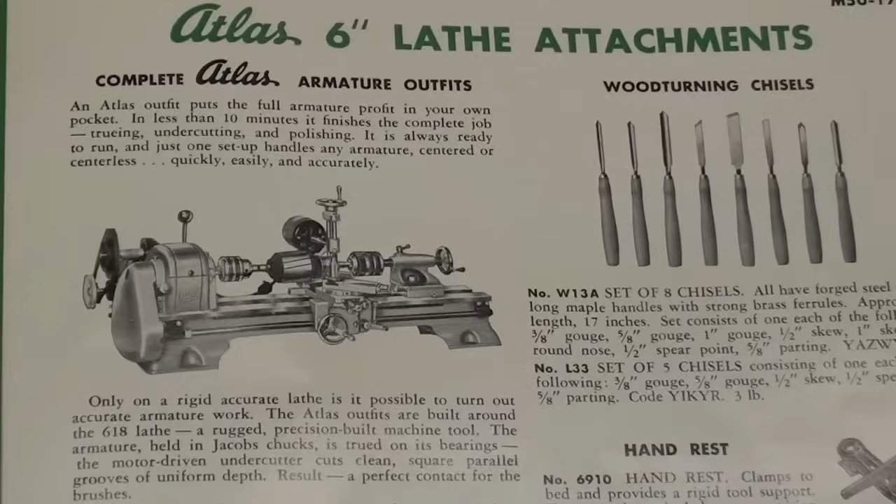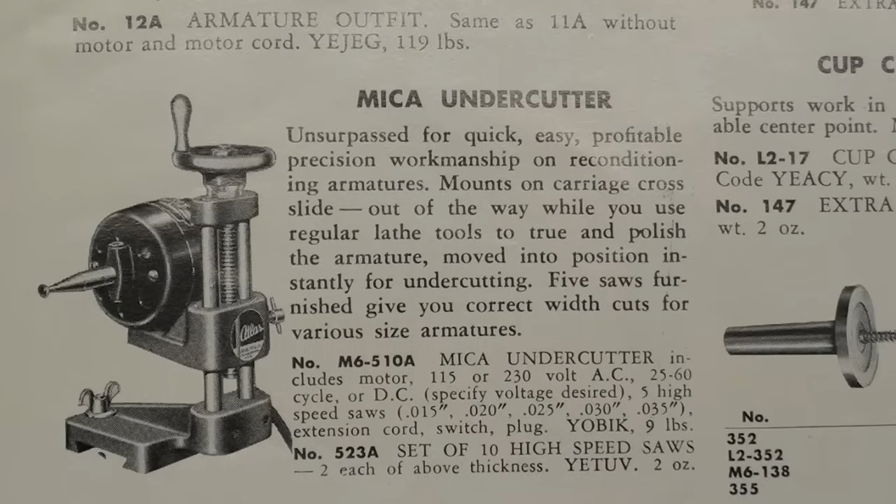And farther down on the page is the beautiful little mica undercutter, which we're going to talk about here momentarily. Now, they made these in two different sizes, for the 10 and 12-inch lathe and for the 6-inch. And I think only the base at the very bottom is the difference between the two.

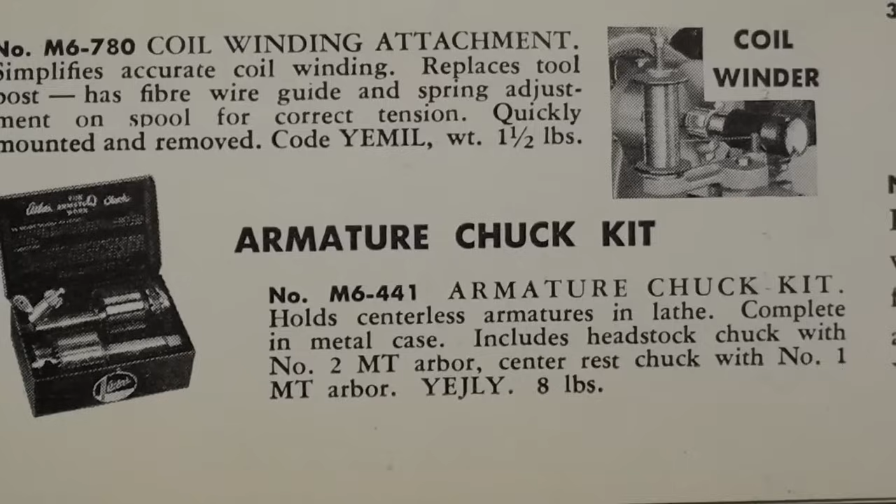And further down, there is the armature chuck kit, and I'm going to talk much more about that. They sold two versions of this, one for the 10 and 12-inch lathe, and the smaller one you see right here for the 6-inch lathe, because it has number 1 Morse taper shanks.

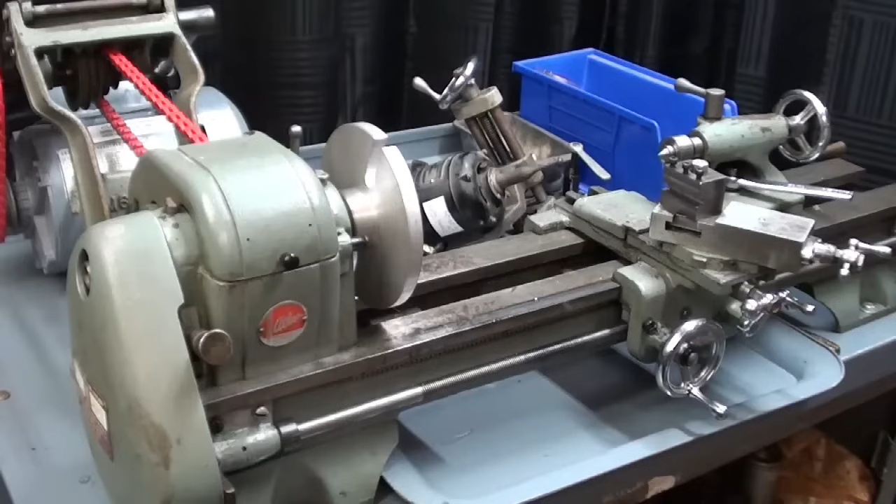Here we are at the 6-inch Atlas lathe, and I just want to show you real quickly how to set this up. I'm not going to actually make any chips, that'll be in future videos, but I'm just trying to explain the general setup of what we're doing here. And there are 3 different ways of holding the armature, so I think I'll cover those real quickly.

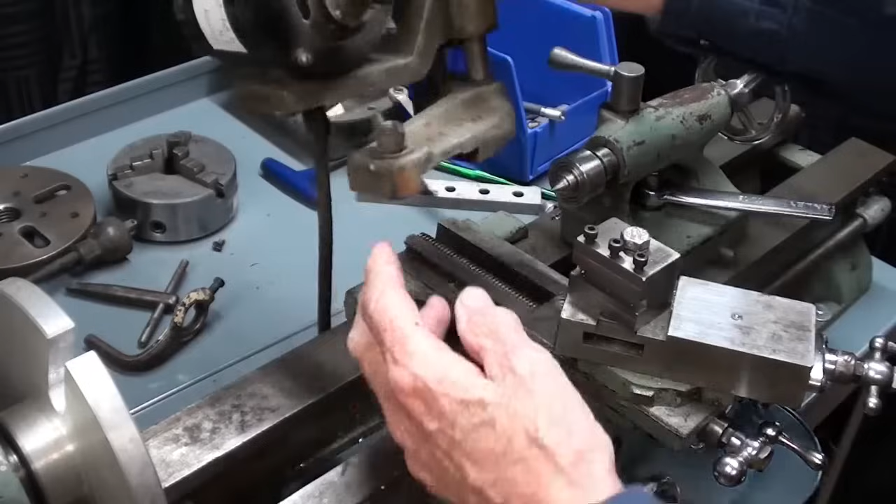But first, let me show you how to mount the mica undercutter. To mount it, remove the screw and take this little cover plate off. That only takes a second, and then you see there's a dovetail right here, and that goes right on the cross slide like that, and you can move it up and back and forth until you get it in the position that you want, and you would lock the wing nut.

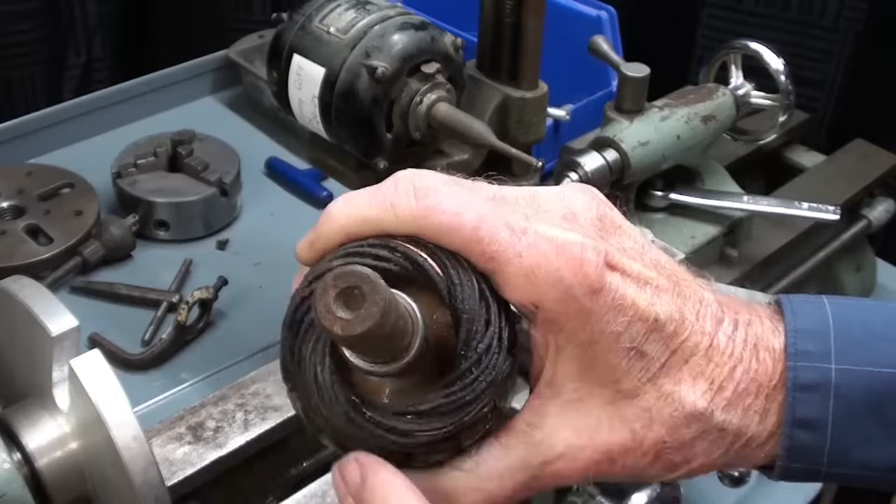Most of the older armature shafts have center holes, and this one does, but not all of them. Also, sometimes those center holes will be beat up by Bubba and not usable unless you clean them.

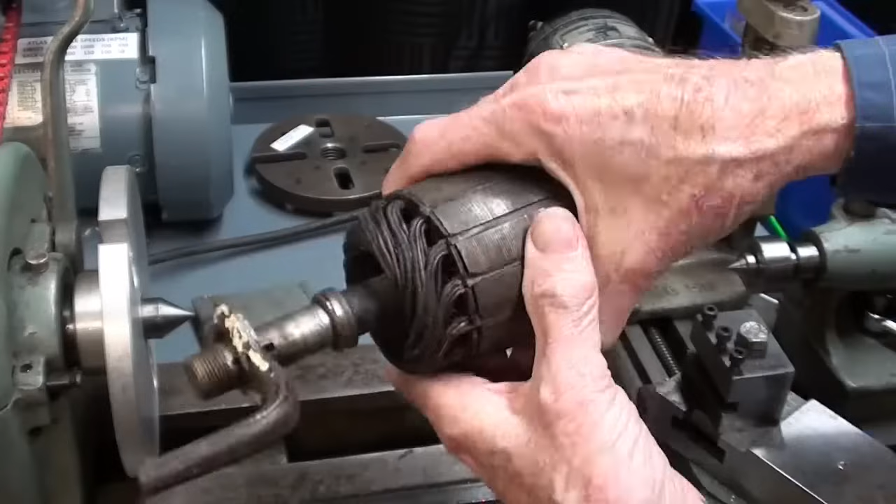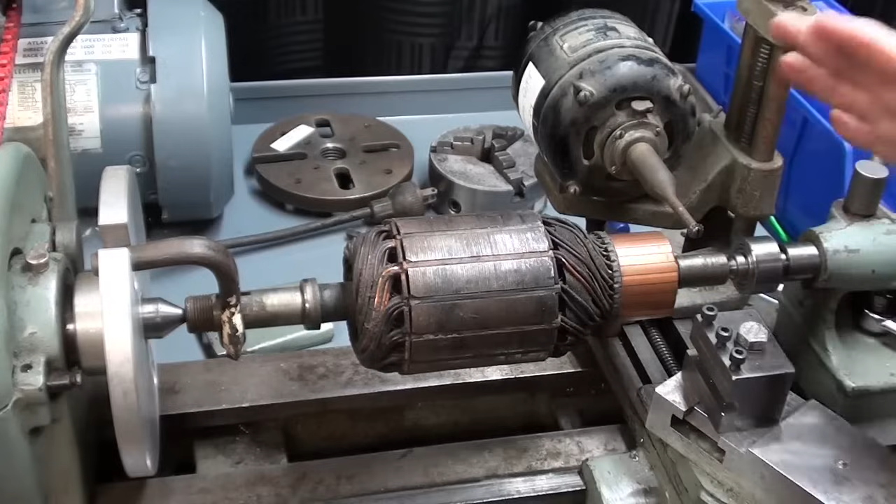But first I want to show you how to hold it with the dog. If you're going to hold the armature between centers, put a dog on there of the appropriate size, and a drive plate, dog plate, face plate, and a center in the headstock, and then set it up like this between centers. Lock everything, and then it's ready to both turn and to undercut.

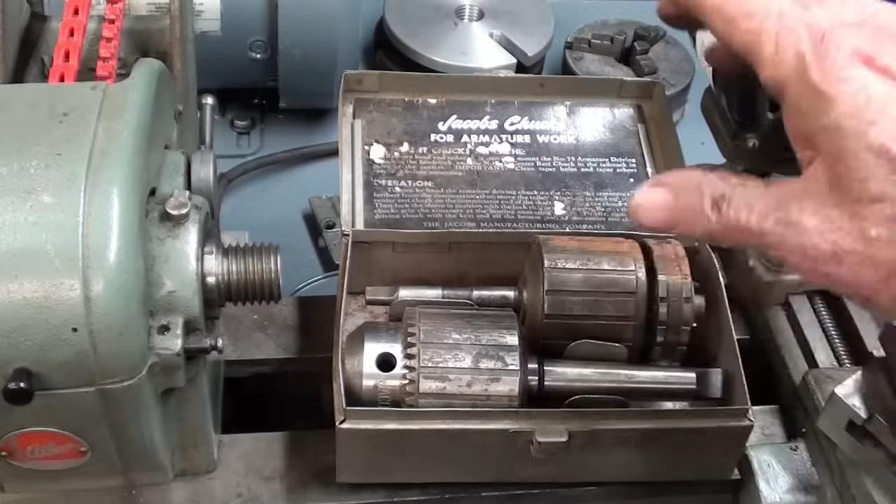Let me show you another way. I just showed you a picture in the catalog of the Jacobs Chuck commutator kit, and Jimmy Goff from Indiana was very kind to me and sent this along to me, but these are special chucks. Now, they made these, as I said, for the 12-inch lathe, and this is for the smaller lathe, because these are 2 specialty chucks. I'll talk more about it in a minute, but this one has the extra large jaws.

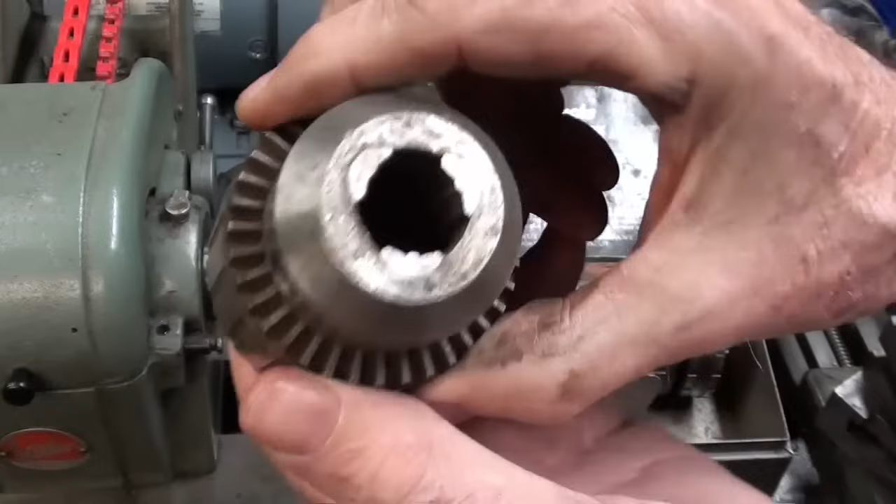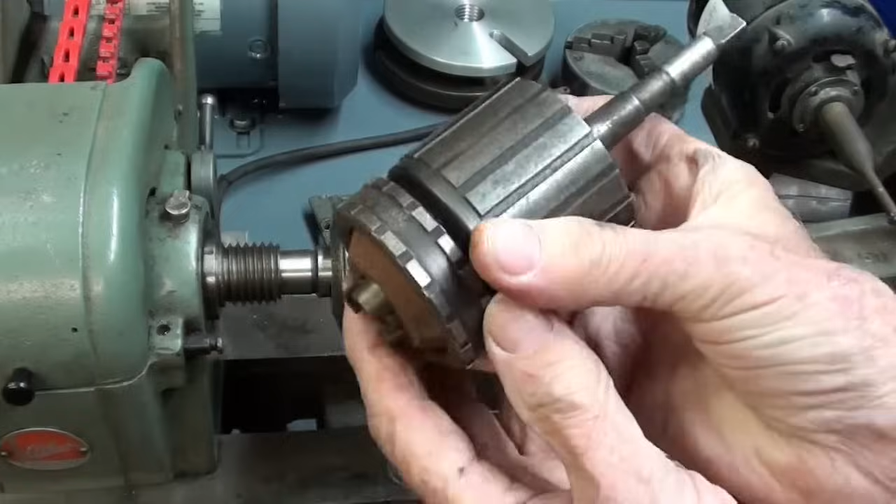It's called an armature chuck, and a number 2 Morse taper, and that'll fit directly in the headstock. I'll get that out of the way like that. And then the other tailstock chuck, and I've shown these many times, has brass jaws, number 1 Morse taper, and that's going to go in the tailstock.

There it is. There's the brass-jawed chuck in the tailstock and the big chuck in the headstock. What I do not like here, and that's just the way you see it in the catalog, is the amount of spindle sticking out. It's just way too much in my opinion.

There are Jacobs chucks that will fit directly on here as well. I do not have one of those to show you, but you could also just use a regular 3-jaw chuck if it's accurate on the headstock. So as you can see, there's various ways of holding it, and all of this can be done on other brands of machinery as well, but of course this will not fit, for instance, on a South Bend. They have their own system for that.

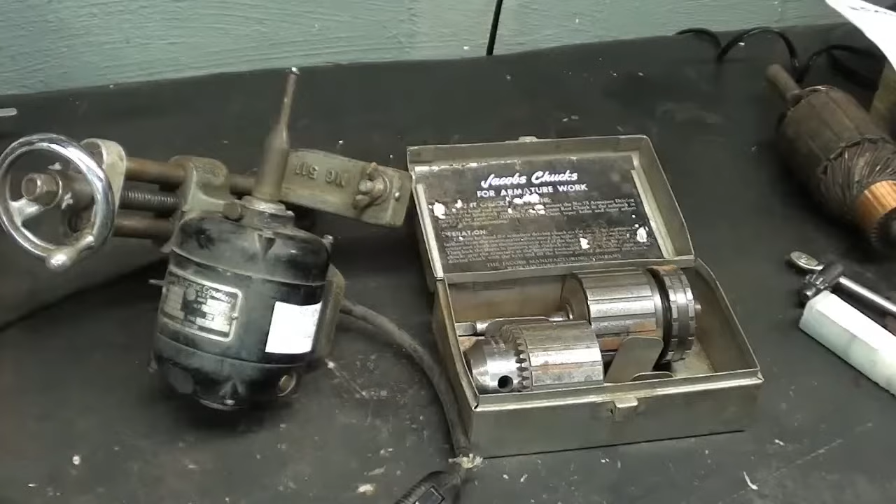Thank you, Jimmy Goff, for sending me all of what you see right here. The problem is this was badly damaged in shipping. I've talked about that before. So this needs to be rebuilt, repaired, reconditioned, and that will be the next video because that's going to take a lot of time.

But let's talk about these two right now, and I want to start with this, although I have already mentioned it. They do not sell these anymore, so don't even bother looking, but you might find them on eBay and they won't be cheap. Nice little metal box, and the date right here is 1954.

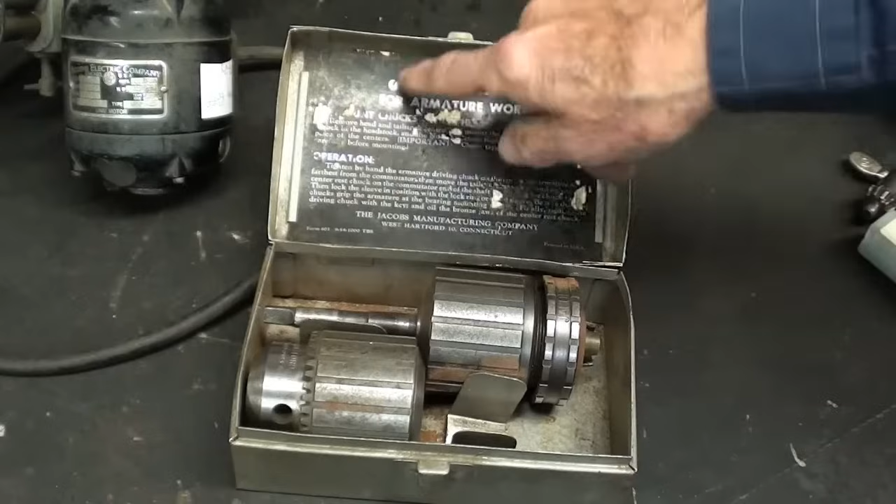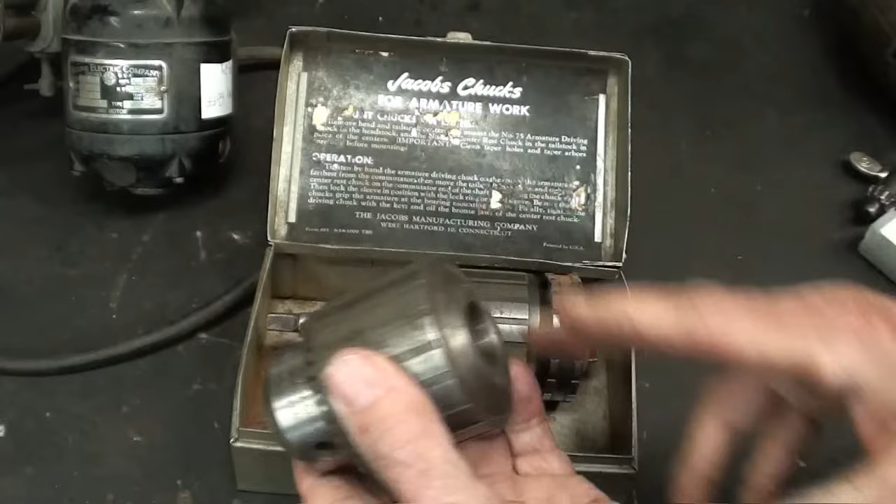At least that's when they printed this informational sheet right here. So that's interesting, a little bit hard to read, but you can always learn something by paying attention. But the interesting thing here is this chuck. Now it's missing the arbor, but no problem, I happen to have one in stock.

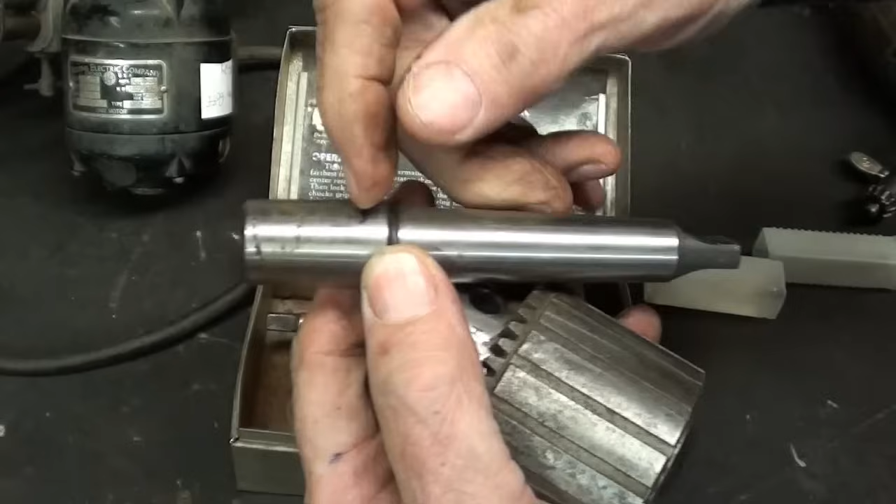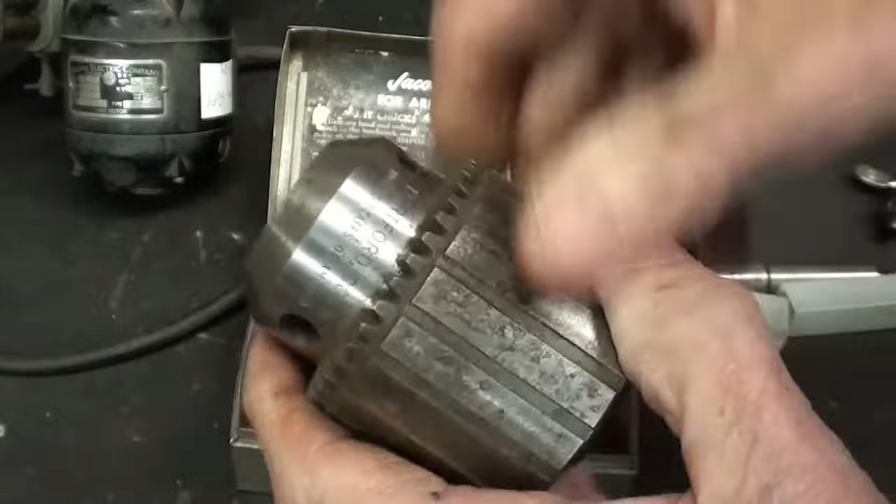And that's a number 3 Morse taper, a number 3 Jacobs taper, a number 2 Morse taper, and I believe I need to cut the tang off in order for it to work right. And this hole has to be cleaned up. Matter of fact, the entire chuck is actually in great condition other than a little corrosion, which doesn't hurt a thing. But in examining this, I could not have been more shocked.

I had to clean it up a little bit to even read it, but it's genuine Jacobs, West Hartford, Connecticut, and it's a number 75A armature chuck. I have never seen what looks like a regular drill chuck that is an armature chuck, and it does not close all the way. I think it'll go down to about a quarter inch, so it's not meant for drilling, but it opens nice and wide to hold the armature shaft.

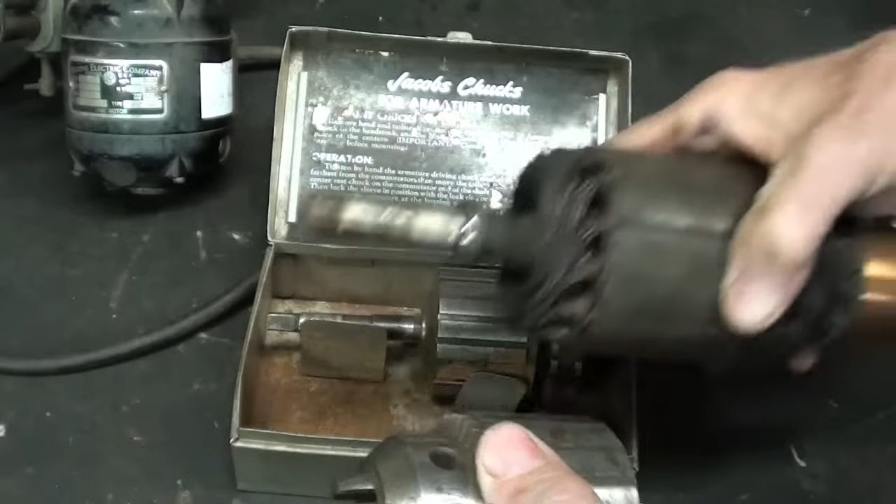So I thought that was interesting, and I went back into an older Jacobs catalog and they made no mention of it, no listing. So this is the only one I've ever seen, at least that I have paid attention to. So I will clean that up and mount that permanently.

But let's take a look at the other chuck. Again, a lot of rust, but the brass jaws are in excellent shape. And these can be used for other purposes, but certainly not holding drills for drilling, but for any work that you need to hold that does not have a center hole, it would work just nice in the tailstock.

So to open and close it, you turn the big sleeve, and when you get it the right size, then you lock it down. And of course you have to oil the brass jaws. So that's all I'm going to say about these little beauties at this time, other than thank you, Jimmy.

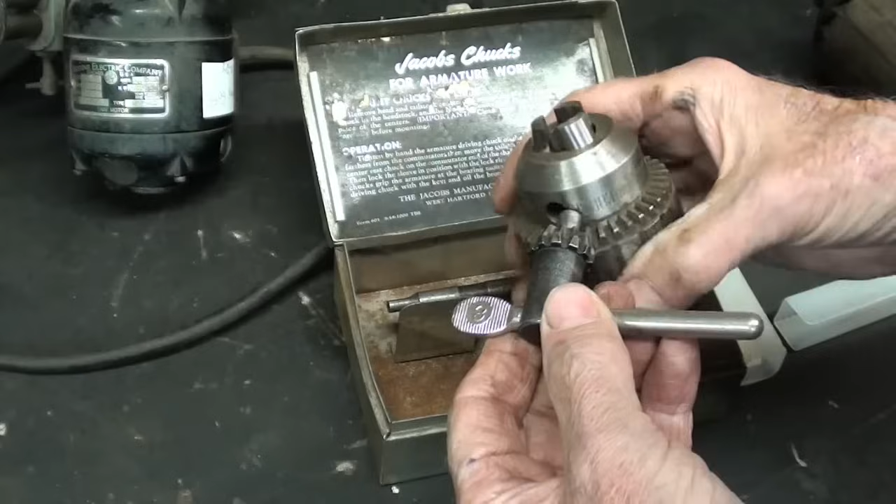There was no chuck key, but it uses a K3, which is probably the most common one, and I got a dozen of them. Well, even though this just came from Indiana, 100 miles, the post office did a number on it, as they usually do. But what did they damage?

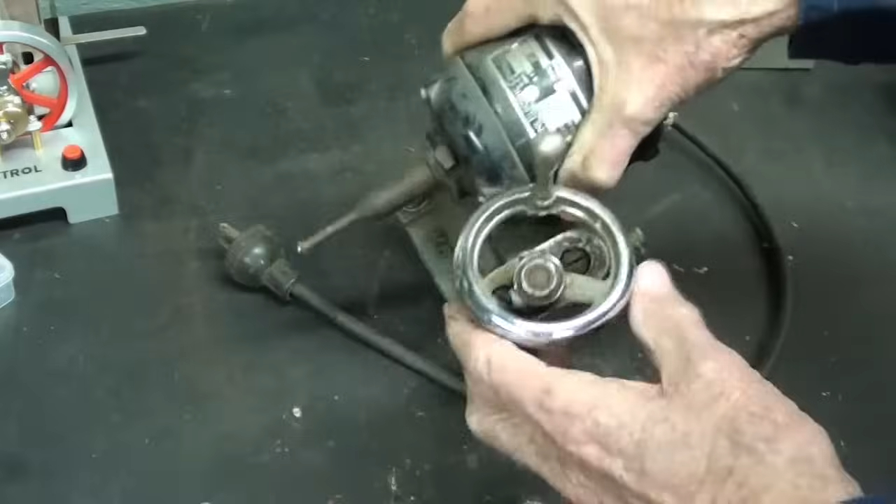First of all, they broke the crank, as you can see. And there's little pieces of it, of the spokes down in the box itself. But here is the miracle. It's almost like divine intervention.

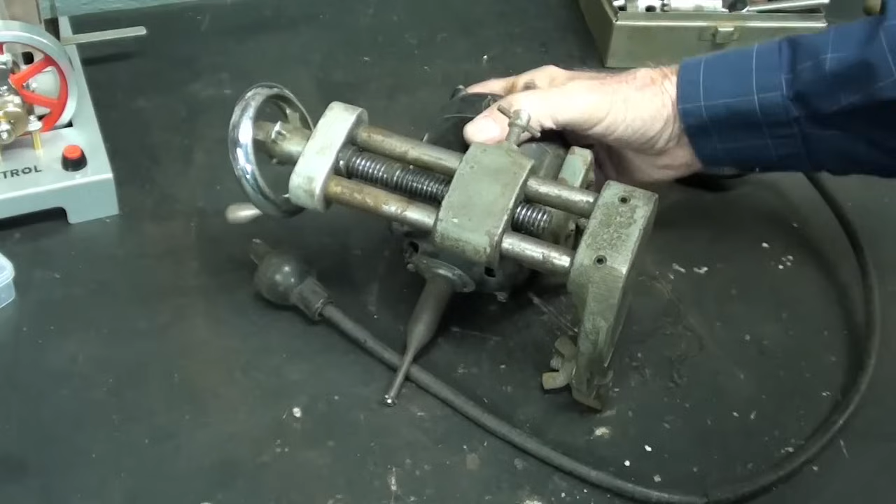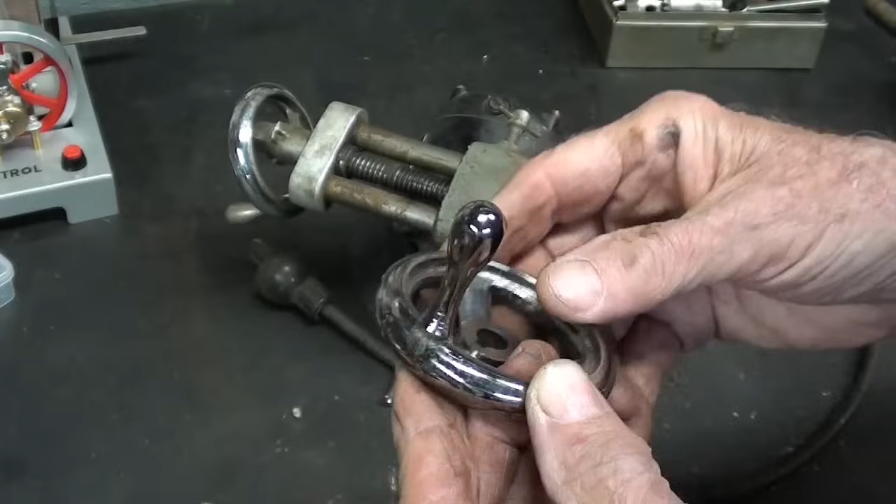Do you remember when I was at Arnfest 2 months ago and I bought that lathe, but there was a box of miscellaneous tooling included, and it came from Nebraska? And you know what was in the box? A hand wheel, and it appears to be the correct one. I just can't believe it that I actually had one of those.

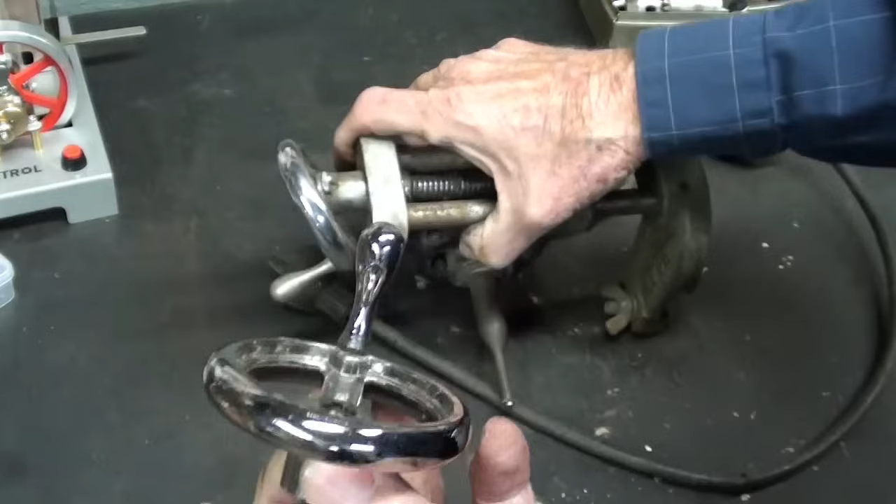But I believe that Atlas used this on more than one machine for different purposes, maybe on the tailstock or the carriage or other accessories. Because why was it in there? And it looks like it's brand new. So that problem is taken care of.

But here's another problem, and maybe this didn't happen in shipping, although I think it did. Can you see that this shaft is bent? Now I hope it's not the motor shaft, that the bend is out here, because I will make a new one, and that'll be in a following video.

The only trick here - I almost stripped this tiny little screw. It's a left-hand screw, so I need a 5-40 left-hand tap in order to even make one of these. You know, there's no end to the aggravation, is there?

And finally, it needs a new cord. As you can see, UL approved. And that's typical of any and all motors or old devices that are 50 years or more - they're brittle. Look at that. Now, Bubba would go ahead and use this with impunity, and he probably wouldn't get hurt either. So I got to replace that.

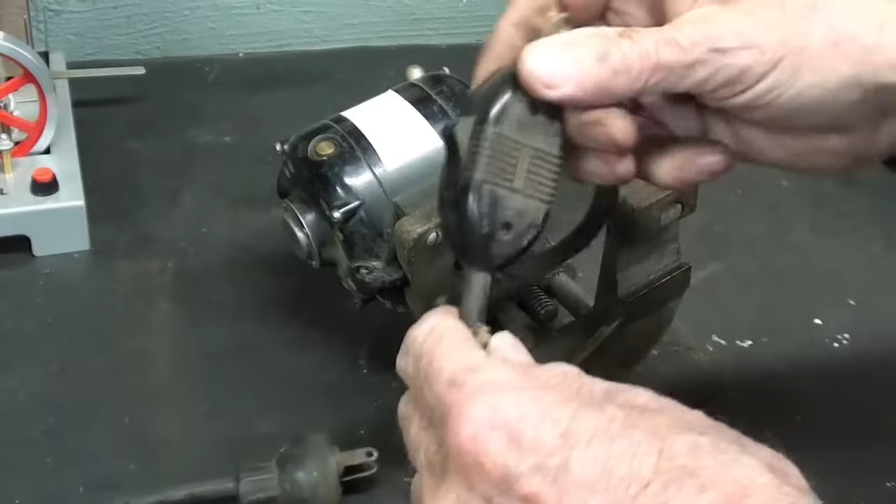I might use the inline switch, but I want to ground the thing, so I have to use 3-wire to meet the electrical codes, NEMA I think they call it. So I probably won't use the switch, and we'll just plug it in for as often as I might actually use this. Now let's talk about the little cutters.

Well, the cutter that was on here was chipped and bad, and where do you get these? Well, I've already asked that question online, and several people helped me, as usual.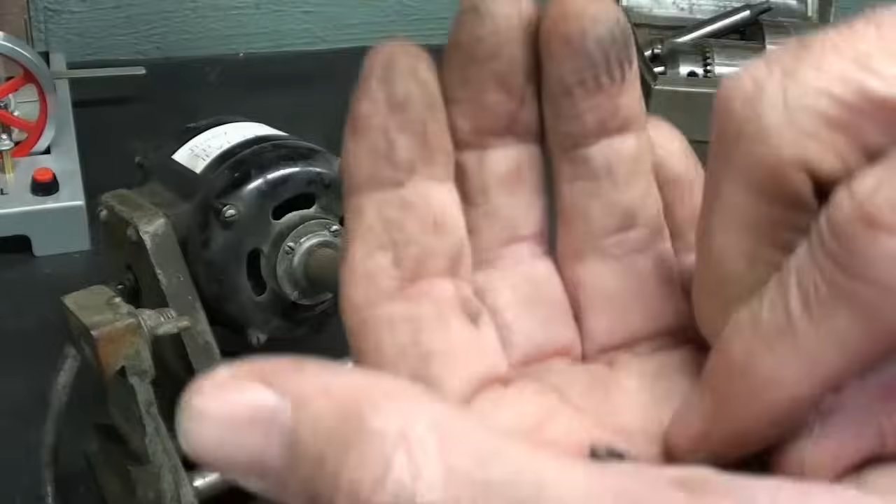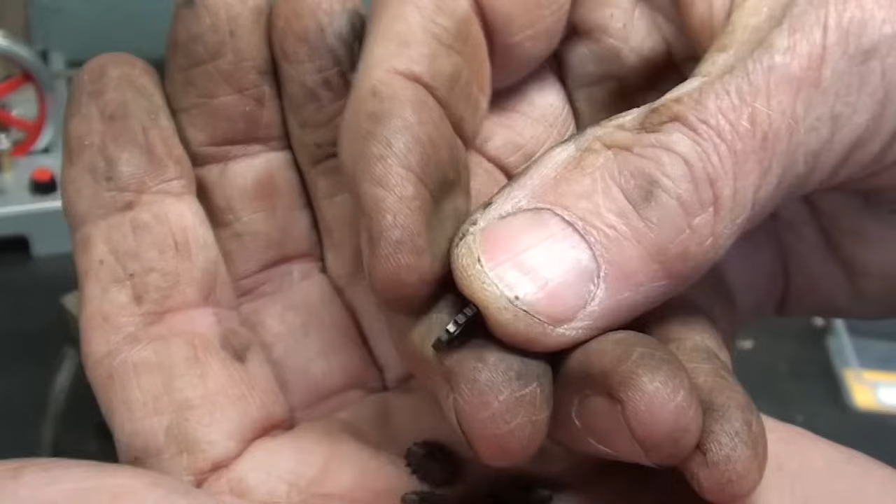But the interesting thing is, one Mr. Jim Files out in California, and he's contributed to the channel before, sent me a handful of these tiny little cutters, and they are 1/8 inch holes, about 3/8 diameter, but they sold them in 5 different thicknesses, and these are rather thick, about 40 thousandths thick, and they might be too thick to undercut. Yeah, they are - they undercut that.

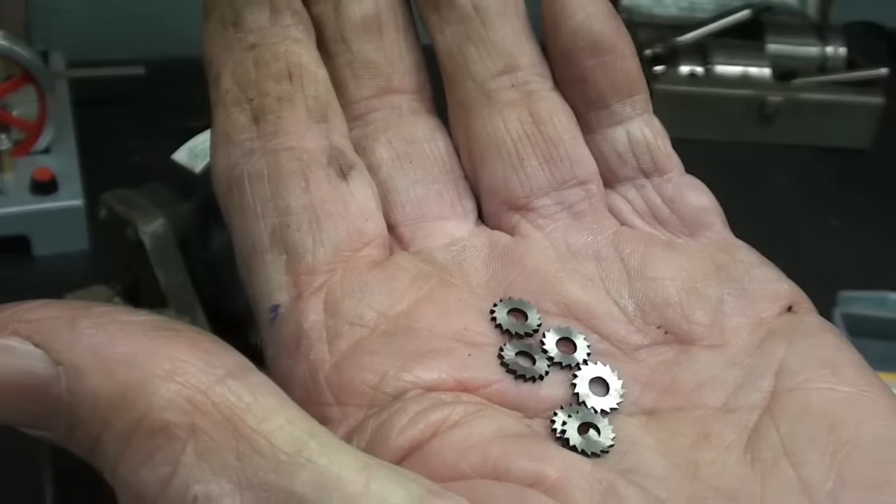Now, let me show you in the catalog sheet real quickly the different sizes. Now, whether or not Atlas Clausing still supplies them, I do not know. Thank you to everyone out there that's sending me information and tools and everything.

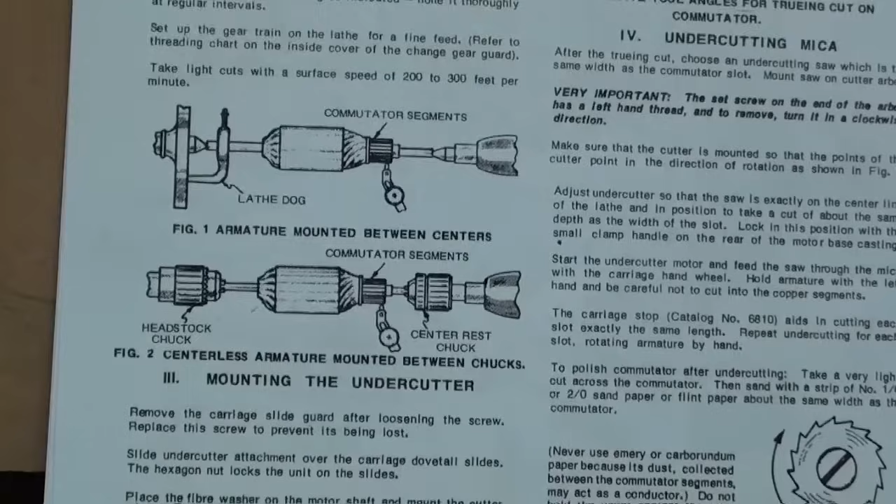But this is a genuine Atlas sheet from 1976, and on it, it tells exactly how to grind the cutting tool, how to set it up. As you see right there, centerless and center type, kind of what I just showed you. And they talk about the cutter and all of the procedures there for doing the actual turning, or truing they call it - it's the same as turning, and the undercutting.

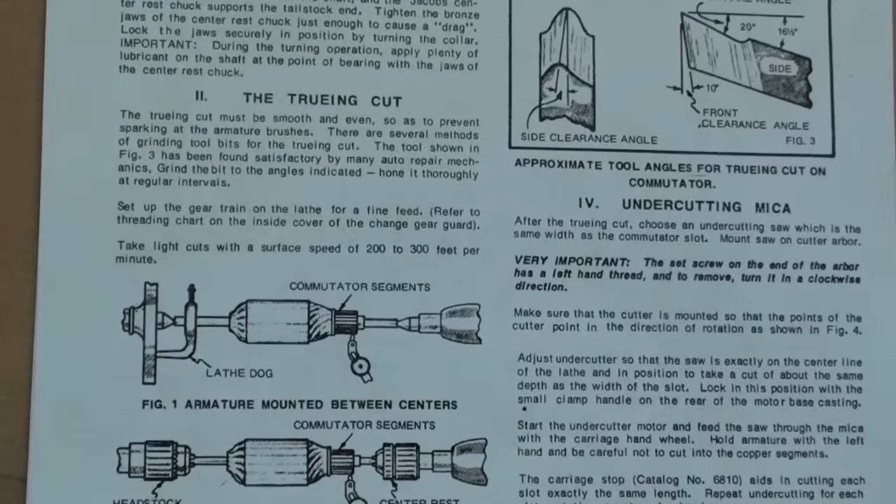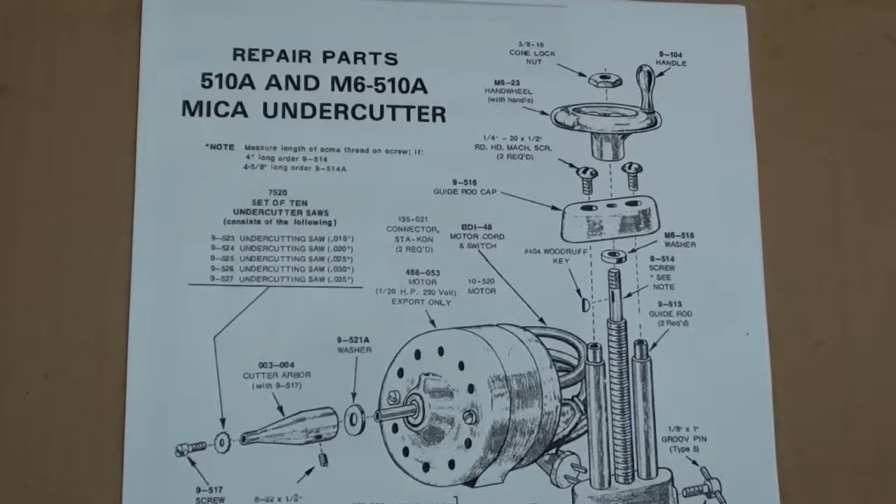And here's a beautiful sheet for repair parts. So I will be using this, of course, when I take it apart. Not that it's that complicated, but there's a complete parts breakdown, and there's the part I need. They don't tell you it's a left-hand screw, do they?

By the way, some of these came with Bodine motors, and others came with Dumore. Mine's a Bodine, which was a very popular make.

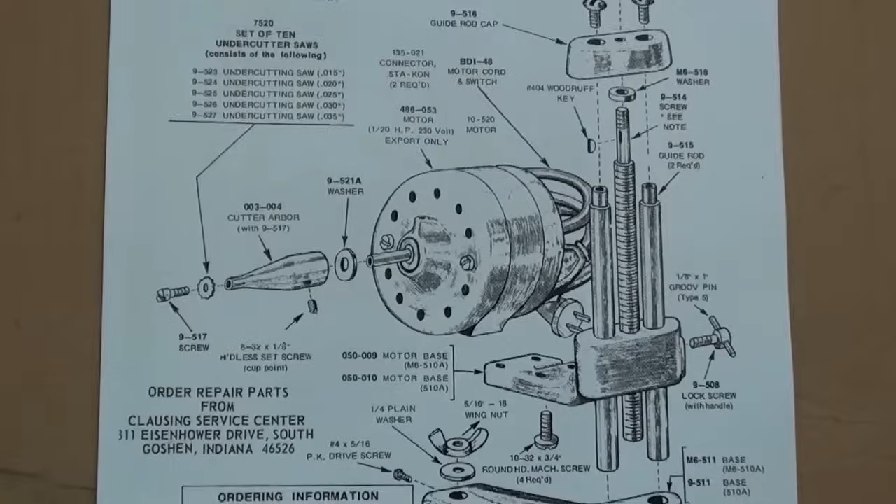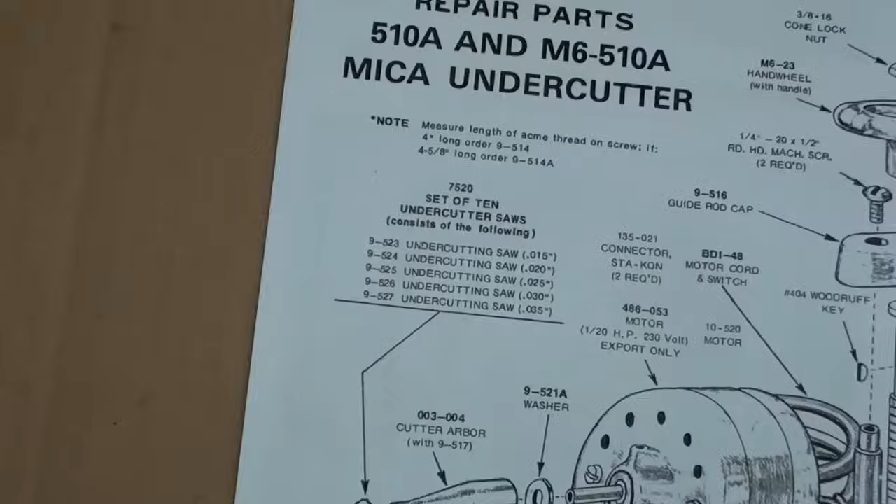But down at the bottom of the sheet, and I got a little sidetracked here, I'm going to show you the different cutters. Well, I said bottom of the sheet - actually, here they are. And you can see that they made them in 5 sizes. Some of them very thin. For instance, the 15 thousandths is just like a 64th thick, approximately.

And they gave you 1 of each, I believe, or maybe 2 of each with the original kit. But I think I need some thinner ones in order to complete the demonstration.

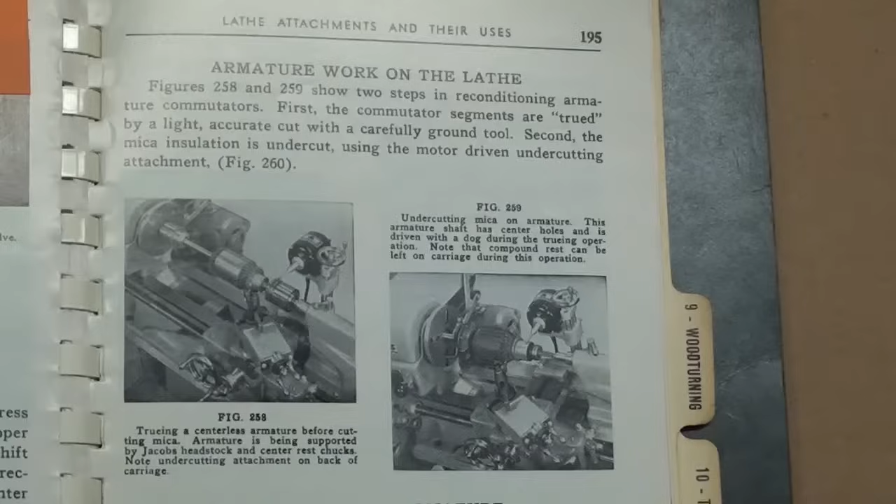I've talked about this book several times. Some of the books say Atlas, some say Craftsman - they are just different covers. Everything inside is identical. So get yourself one of these from eBay, or I believe Vintage Machinery has them, but you'll have to print them off on your printer. Near the back of the book are several pages on how to do this work.

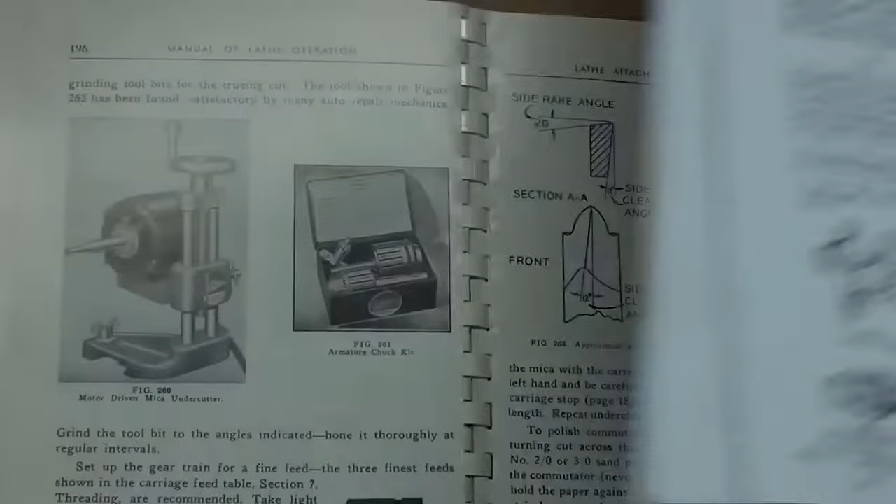Let me turn the page. Now, I'm not going to read this to you, but you might recognize this picture here. It's really the same picture that's right there. So some of the information is duplicate, but that's just fine. And I'll be giving a demonstration on this anyway, so you won't have to go through the pain of reading it.

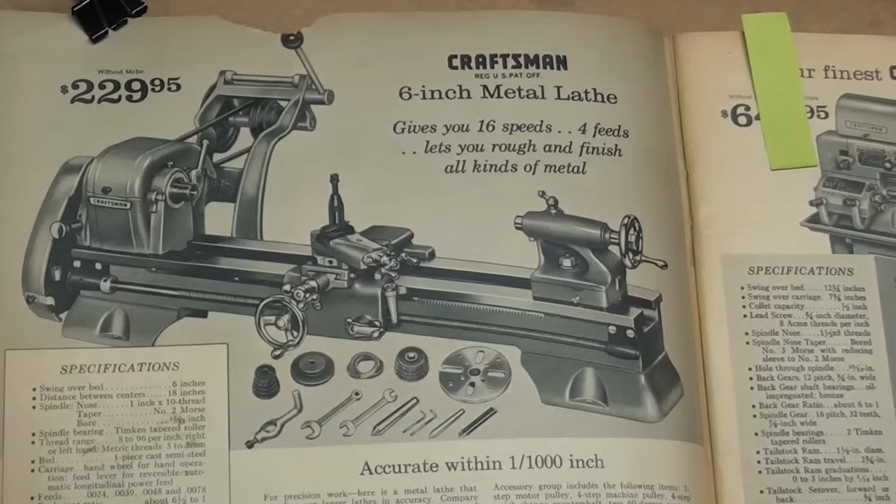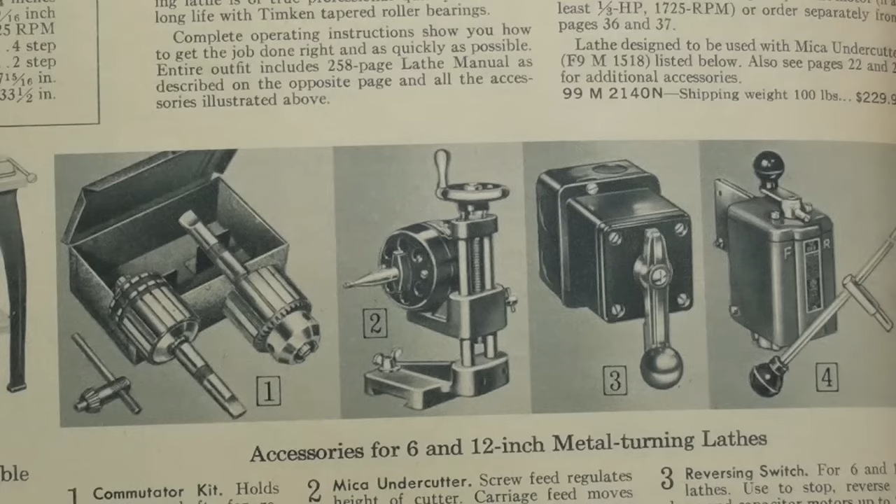This is the 1966 Sears Craftsman tool catalog, and there's that beautiful little 6-inch lathe, exactly the same as the Atlas. But at the bottom where you see the accessories, there is the mica undercutter and the armature kit. So they sold the same thing at Sears as they did from an Atlas industrial supplier.

If you watched my video fairly recently where I was up at Arnfest, I bought that 6-inch machine. I also bought a Trucut armature lathe, but it's incomplete, and it will be the subject of videos in the future, maybe. If this doesn't fly, why would I bother with the Trucut?

But there's so much missing off my Trucut armature lathe. A couple days ago, on Sunday morning, early in the morning, someone knocked at the door, and it was my friend from Pontiac, David Kennedy, and he brought this kit to me on loan. I'm not going to keep it, but he said if there's anything in here that you can use on the Trucut, go ahead and take it out. In here are the belts and extra parts and I don't know what all.

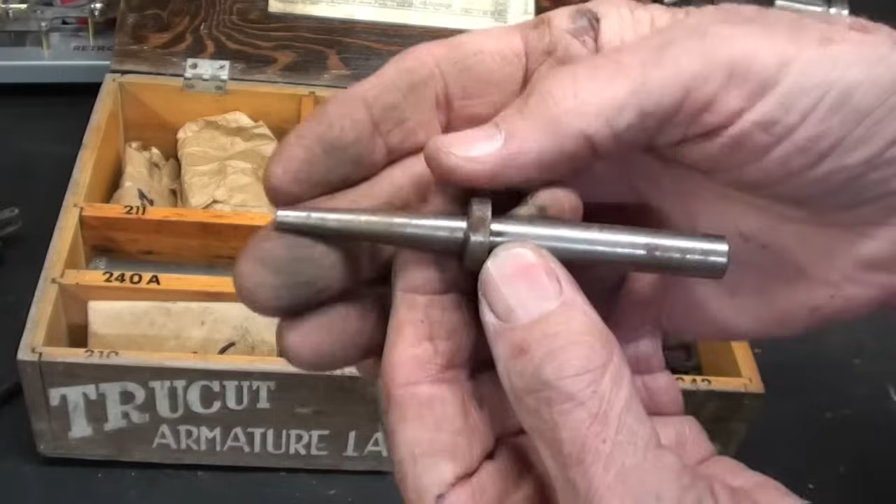Jaws, that'll be covered, but I've never seen a kit like this before. Have you? And I thought, oh, wonderful, there is the arbor. But no, it needs a hole right here. So Trucut used a different system, but the general principles are identical.

So watch for another video on this, which I think you will find interesting if I actually do it, but it'll be a little while down the line. All kinds of parts in here, brand new, and this is also from the 50s, I believe. There's a parts list and a price list and all of that.

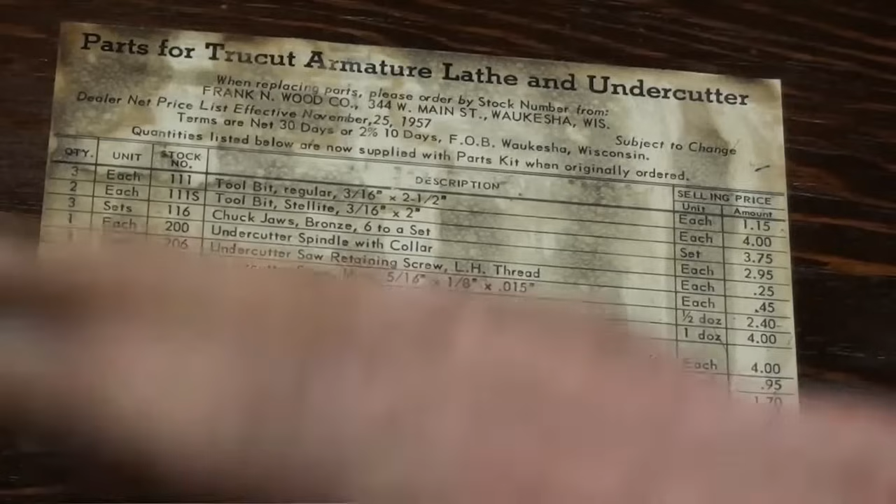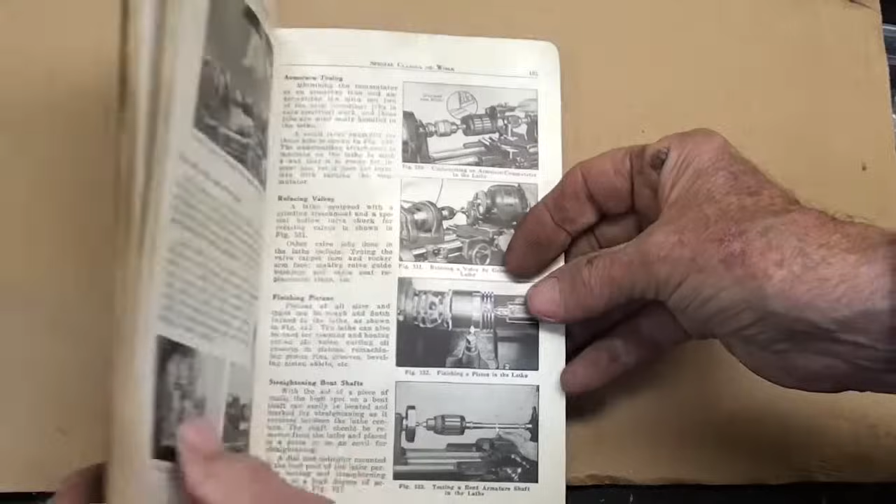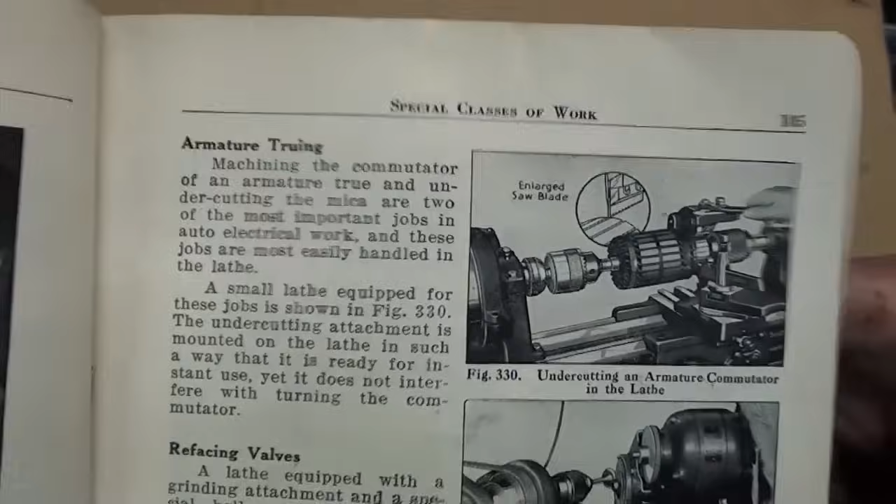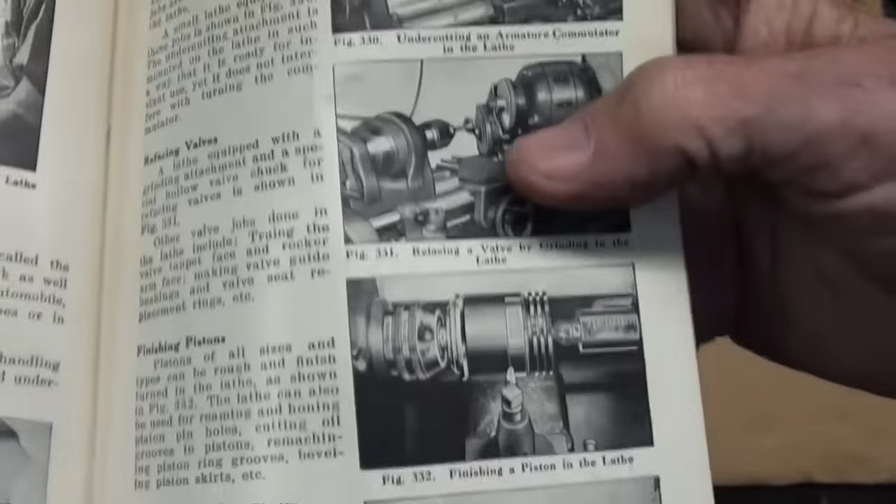Possibly I'm off topic right now, but this is the South Bend How to Run a Lathe book. They printed 5 million copies in many different languages, but there are 2 pages on how to work on armatures. And they use quite a different method for undercutting the mica. There it is, but it's a hand operated machine, that is, it's not motorized. It uses a little hacksaw blade, I believe, which is the way I did it when I was in high school. But for those of you that have a South Bend, go ahead and read those pages.

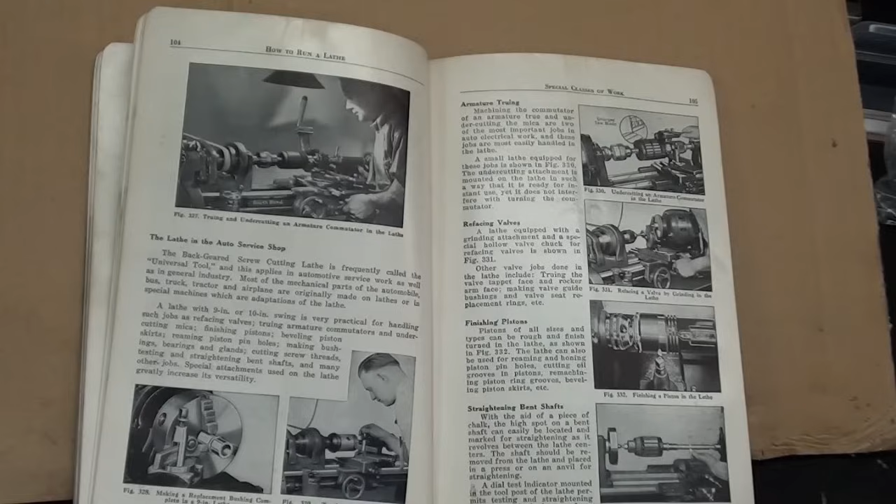Also, South Bend printed a lot of little short booklets, such as how to lubricate your lathe, how to do this, how to do that. And they did have a little booklet on automotive work, specifically armature work. Check it out, you can probably find copies of that on Vintage Machinery.

Well, as promised, I didn't make any chips, I just gabbed for 15 minutes. But if you want to see me rebuild this mica undercutter, that'll be in Tips 1006, and I think you might enjoy that. In the following videos I'll actually put it to use and turn a commutator and undercut the mica. I know you can't wait.